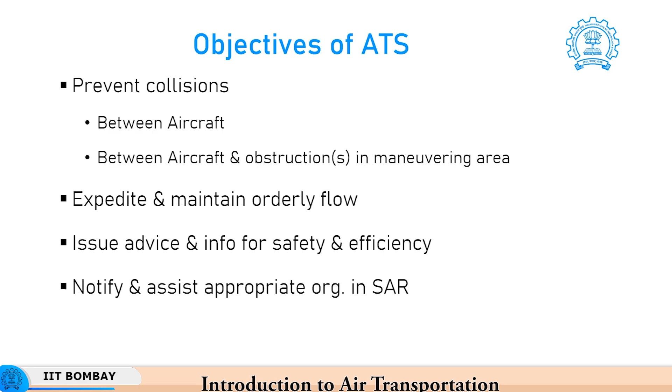To ensure that there is seamless connectivity between an aircraft from one particular airport to the other airport, and there is a continuous guidance and support available, we have to look at how the air traffic control is divided into various types, and responsibility for each area is allotted to a particular unit of the air traffic services.

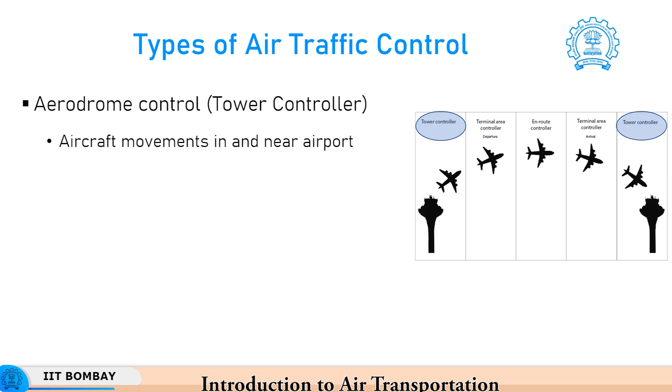So, the first of them is the aerodrome control tower, sometimes also called as the airport control tower. The words aerodrome and airport are going to be used interchangeably, so they are the same. So, the aerodrome control is normally managed by a person or a group of persons called as the tower controller. Okay. So, every airport generally has a control tower or a control cabin.

The tower controller at both the origin airport and the destination airport is responsible and concerned about the safe movements of the aircraft near and in the airport. Okay. Mainly, you can say mainly when the aircraft is on the ground. And I am not saying that the tower controller is not going to be concerned about anybody who is in the air, but the main responsibility of the tower controller is for the ground movement.

Then we have the approach control, or also called as the terminal controller or terminal controller units. These are units which are responsible for the movement of the aircraft during arrival and departure. Once the permission is given for an aircraft to initiate takeoff or to initiate landing, this particular control is exercised by the terminal controller or the approach controller. As I said, they are responsible for arriving and departing aircraft.

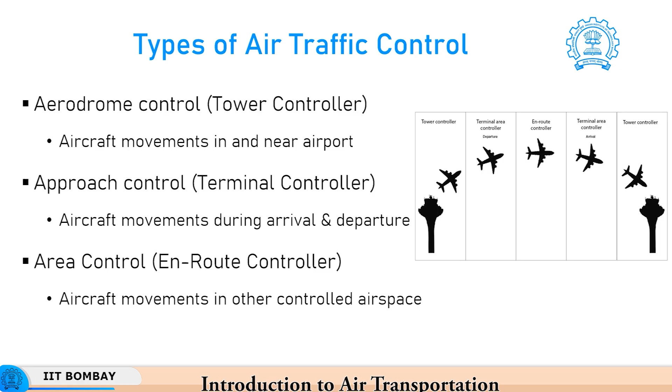They allow operations to be done expeditiously, and area control gives long term guidance and information to aircraft which are overflying. To meet this requirement, the air traffic system is broken into various units, closely related to the ones we saw.

Remember, these units could be either in the forefront or behind the scenes. The three I mentioned, aerodrome control, terminal control and en route control, are all in the forefront, but there are three or more agencies working behind the scenes. Let us look at them one by one.

The aerodrome control tower, abbreviated as TWR, looks at aircraft on the maneuvering area in the vicinity. Then you have approach control office, or APP, which looks at arriving and departing aircraft, and area control center, or ACC, which looks at en route or overflying aircraft. These are the ones in the forefront, but there are many ATS units which work behind the scenes.

There is something called the Flight Information Center, or FIC. This gives advice and information to pilots, and this is very important because the situation, the availability of navigational aids, and the weather at the destination is not the same every time. So when a pilot is about to board a flight and plan the journey, they have to be given advice and information. That is done in the FIC.

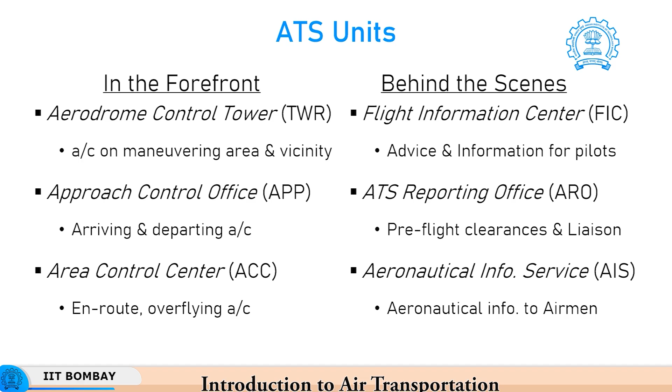In the FIC, pilots are given detailed information regarding all the things relevant to that particular day and that particular operation. But the AIS is a very generic agency or unit where information regarding all the NOTAMs is placed. These agencies work behind the scenes, but they are equally important to ensure that the goal of ATS is being met.

Now we come to the three pillars on which the whole edifice of air traffic services stands. The first is communication, the next is navigation, and the third is surveillance. Communication, navigation, surveillance is normally abbreviated as CNS, and generally the provision of services is called air traffic management. So the full acronym is CNS ATM, and that becomes the entire edifice of the air traffic services.

Now let us look at each of these three pillars, what they stand for, what they involve, and what is their importance.

Starting with communications. Communications is very important because every flying object, every aircraft is operating within the realm of the geographic coverage of an area. So it is important for everybody else to know, and there are air traffic managers who are looking at the whole scenario, so they need to talk, they need to communicate.

So communication is very important, but it is not just air to ground or ground to air communication. Communication generally is both ways, two-way generally. Some communication takes place automatically in one direction, as we will see, but generally we have communication both ways. What most people are aware of is the air to ground and ground to air communication between pilots and air traffic controllers and vice versa.

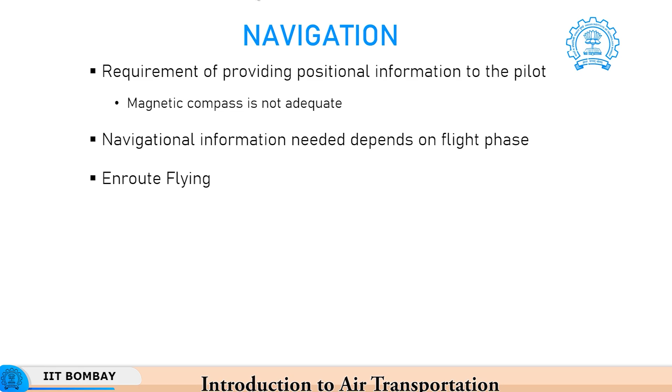The information that is required to be given to the flight crew members depends on which flight phase they are operating in. Of course, in each phase they will have separate requirements. For instance, when the aircraft is en route flying, overflying, not on the ground, not during takeoff and landing, but mostly in level cruise long distance flight,

you require your current location, and that can be done using an instrument such as the non-directional beacon, NDB, which has a unit called the automatic direction finder, ADF. This was a very primitive and old fashioned instrument, and we will talk about these instruments in detail in our talk on navigation. Then you have more sophisticated equipment called the very high frequency omni range, or VOR, and there is one more equipment called the distance measuring equipment. Many times a DME is co-located with the VOR, so we call it a VOR DME or a VORTAC. All those will come, but remember, when en route flying, what is required is your current position along the flight path that has been chosen.

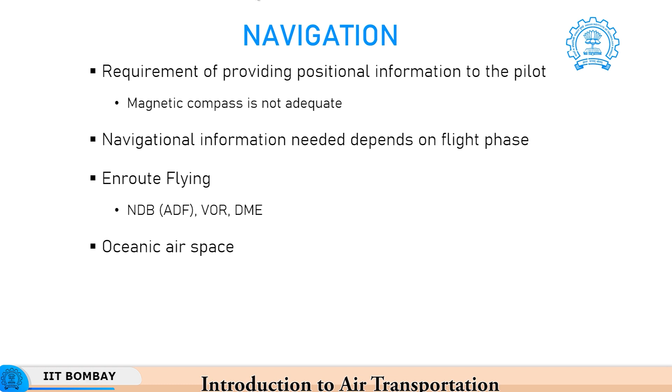But when you fly over oceanic airspace, that means over a large swath of ocean, it is very difficult to provide regular navigational updates, because in the sea it is difficult to maintain and provide navigational information, as there are no instruments available as frequently as on the ground. So there we depend mostly on the inertial navigation system, which is inbuilt on the aircraft, the INS, or the global positioning system, GPS, which is the same one we use for navigating our vehicles on the land.

When you come for approach and landing, you require a different kind of information. You have to be oriented towards the runway center line, and you have to be sure you are coming at an angle so that you will touch the runway at the correct point, so that you can land within the runway distance available. For that, we have a dedicated instrument called the instrument landing system, and we will have a detailed lecture on the working and features of an instrument landing system. Therefore, information regarding navigation is a function of the phase the aircraft is in, and appropriate instruments are available to provide guidance to the pilots.

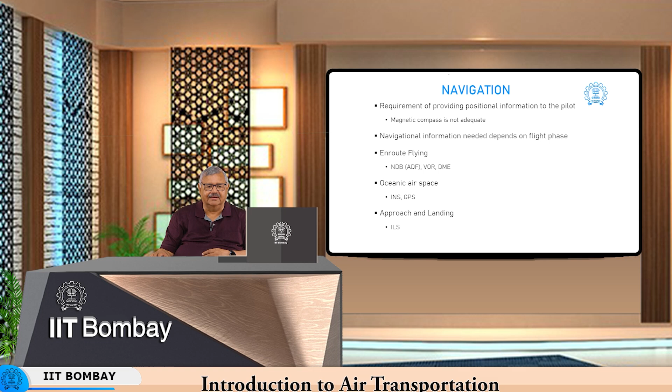Let us have a look at an example of navigation. Information regarding what the aircraft intends to do is communicated by an airline to the air traffic management services using what is called a flight plan. A flight plan is a document that mentions to the ATM agency what is the intention and what is the plan of action, and it contains lots of information.

It is filed before each flight operation. Although you may have the same flight every day, you will have to have a special or specific flight plan for each flight. It contains a lot of information which is useful for operation.

For example, it contains aircraft identification information, the call sign of the aircraft or the number of the aircraft which is on the tail. It talks about under what flight rules it will fly and what type of flight it is - we will see a little bit later. It mentions the number and type of aircraft that are going to be used. It talks about what is called a wake turbulence category - again we will look at it in more detail later on. It will tell you what equipment is available on board.

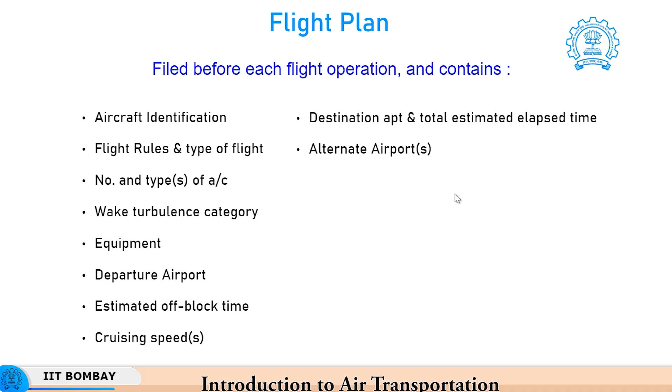It will tell you which departure airport it intends to operate from. It also tells you the estimated time when it will leave - of course this time will be adjusted by the clearances given by the aerodrome controller - and then at what speed it would prefer to fly, at what altitude it will prefer to fly, what is the destination airport, what is the total time expected to take to travel. In case there is a problem, where will you divert to - the alternate airport or maybe more than one airport - how much fuel you have, how many hours you can fly with the onboard fuel, and the total number of people planned to be carried on the aircraft.

Okay. Then what kind of emergency and survival equipment is available on this aircraft in case some incident happens, and many other information. So, this entire information which is required to be known by the air traffic management authorities for every flight is filed through a flight plan.

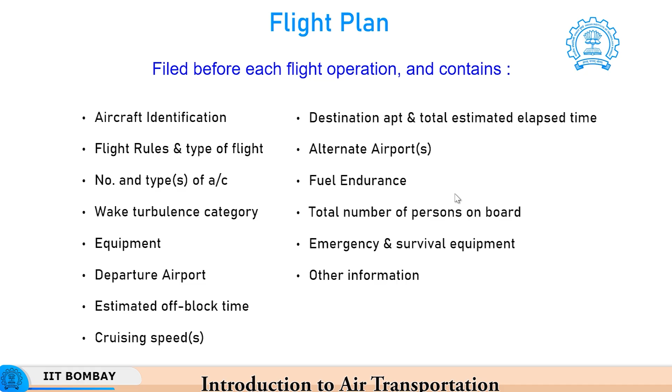In most airports or in most air traffic management zones, you need to file your flight plan minimum 2 hours before the departure. So, that is like a communication of your intention of travel, and then that flight plan gets accepted in the system, and once it gets accepted in the system, then the air traffic authorities know which aircraft are going to come at what time. Of course, they will decide which one will actually go. Rarely you will be able to operate the aircraft perfectly as per the flight plan.

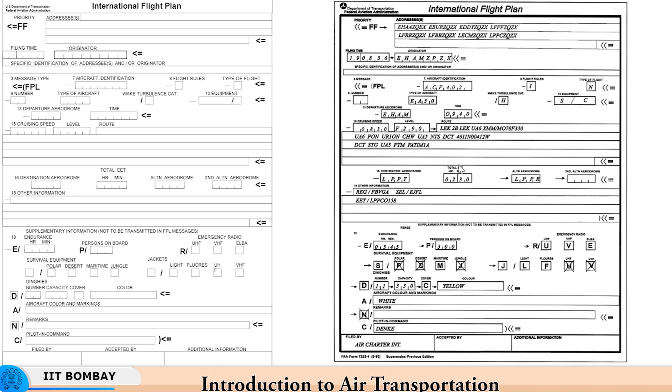So, here is an example of a flight plan. You can see the blank format of a flight plan. This is the international flight plan. So, all the things which I mentioned are all listed here, you can see. And here is an example of a filled flight plan. All the information, like for example, what will be the route, what is the flight time, all information regarding the aircraft and the route is mentioned. Normally we file a computerized flight plan. So, this information gets into the system automatically.

Now, let us look at an example of how navigation is actually accomplished. So, I have taken an example of a flight from Mumbai airport, which is abbreviated as VABB, to New Delhi airport, which is abbreviated as VIDP. This is one of the busiest routes. In fact, this is the 6th busiest route all over the world and the busiest route in India. So, let us see how flights take place along this route.

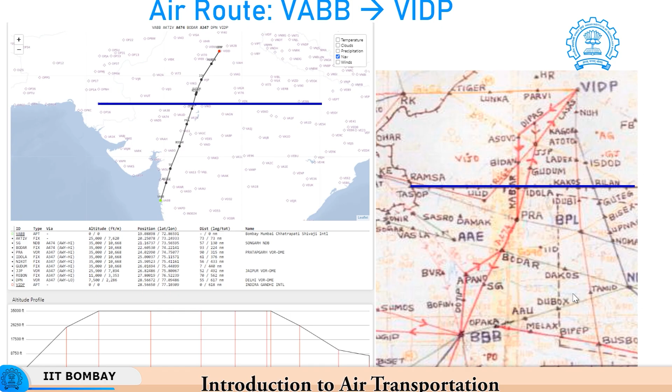Now, this blue line represents the boundary of what is called the Flight Information Region, or FIR, which we will see very soon. The area below the blue line represents Mumbai FIR. So, aircraft flying in this area are under the direct control of the air traffic controllers operating from the Mumbai zone, and the area above the blue line in this figure represents the area controlled by the New Delhi FIR or Delhi FIR. So, aircraft which are in that zone are normally controlled by people operating under Delhi FIR.

So, now we come to surveillance, the third pillar of air traffic management. So, here we just ponder and ask a question: what is the information that an air traffic manager needs when you are trying to do the surveillance of an aircraft flying in the air? Okay. So, basically what you need is a consolidated real time picture of all the air traffic that is present in the airspace which is being controlled or managed, correct. All aircraft, all flying objects in the space that a person is maintaining or operating, you need a consolidated picture and you need the information in real time.

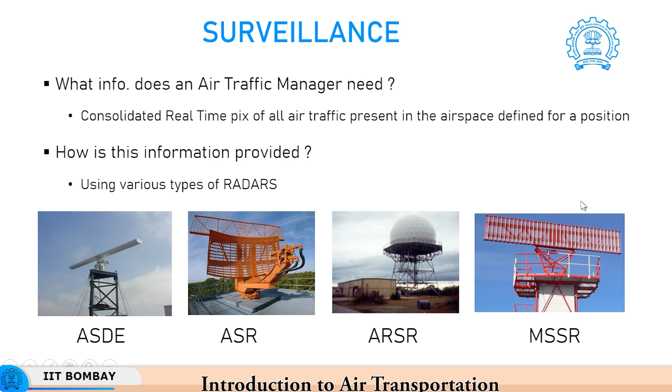It's interesting to know how this information is provided. This is normally provided using various types of radars. Okay. So, there are these 4 types of radars. The first one on the bottom left is the Airport Surface Detection Equipment or ASDE. This is the radar dedicated for looking at the traffic on the ground, and we will talk about all of these radars one by one. These are the 4 main types of radars which are used for surveillance by an air traffic manager.

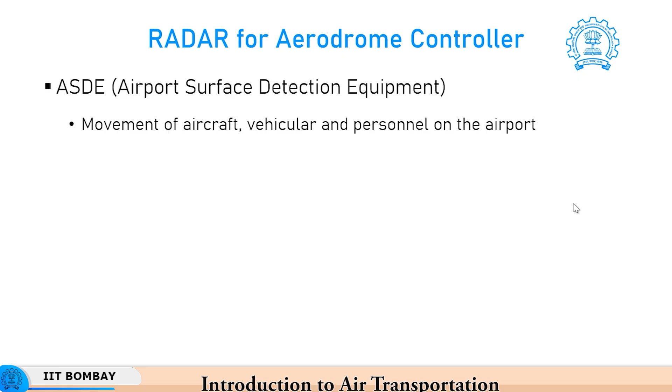So, let us look at now the radar for the aerodrome controller who is interested in surface movement, that is the ASDE. This is a very expensive equipment, so you will not see it at every airport. You can justify an ASDE only at those airports where there is a huge amount of movement. So, in India for example, Mumbai airport has a lot of surface movements and so has Delhi. So, ASDE is the equipment that you will find only at such airports. This particular radar is looking only at aircraft, vehicles and people on the ground. This is an example of the imagery that is available to the aerodrome controller on an ASDE equipment.

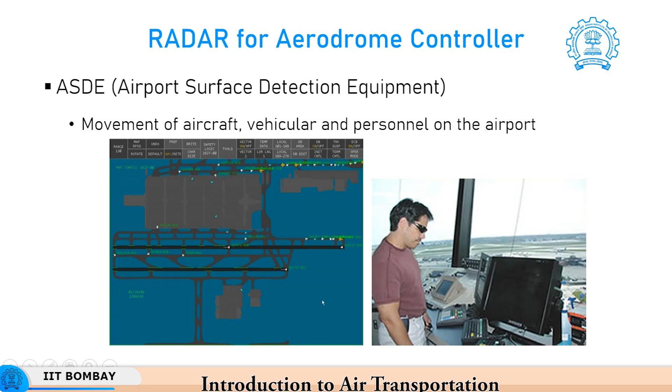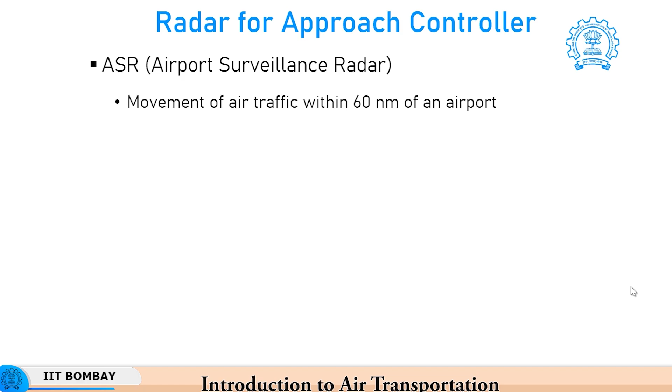Then moving on, let us look at the approach controller. The approach controller is interested in locating arriving and departing aircraft. So, they need what is called an airport surveillance radar. This radar is able to monitor the air traffic within about 60 nautical miles or approximately 120 kilometers or a little bit less from an airport, which is where arriving and departing aircraft generally are, because after that they will go to the area controller.

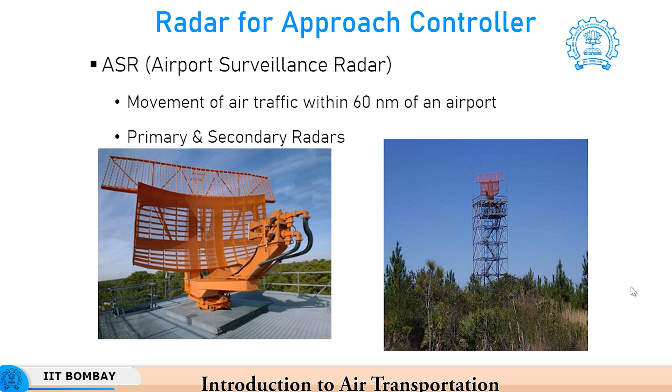Okay. So, you have here primary and secondary radars. You can see the close up of a primary radar, and you can see such radars at the airports. They keep rotating and they provide, as I mentioned, information regarding the aircraft located within around 60 nautical miles. They may be mounted at some height so that they can clear the obstacles near the airport and look far away.

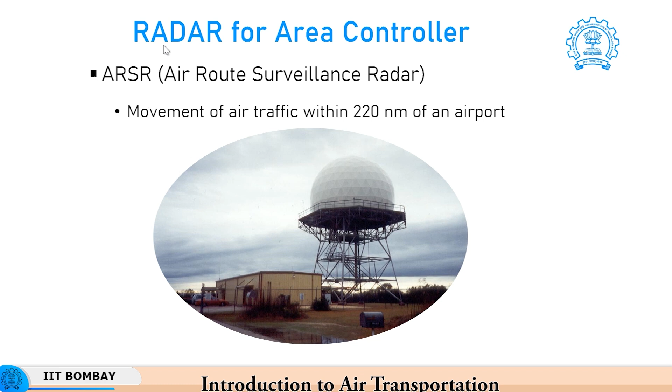Okay. Then you also have a secondary surveillance radar. Now, the ARSR which I showed you in the previous slide only detects the bearing, or which direction you are coming from. That is not enough. So, bearing basically means an aircraft is present, and what you need is more information about the aircraft. The working of the basic radar is using the detected reflections of radio signals. However, you also need extra information.

So, the secondary surveillance radar or SSR requests additional information from the aircraft. For example, what is the identity, because there will be many aircraft on the same route at various altitudes. So, just their presence is not enough, we need to know the identity. So, each aircraft has got an ID which will be flashed on the SSR along with the aircraft as a label, and we also want to know the altitude at which they are, correct. This information is communicated to the SSR by the aircraft using what is called the transponder. There is an onboard instrument called a transponder.

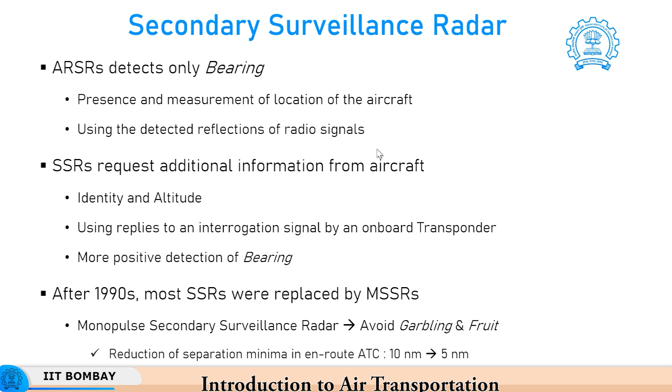So, hence the separation between them, which was earlier minimum 10 nautical miles, can be reduced to 5 nautical miles, thus allowing larger throughput. So currently most of these radars for the area controller are MSSRs.

So, summing up, let us list down the responsibilities of the air traffic controller. First, they are supposed to provide information. In some cases, provision of information is mandatory and the instructions of the ATC cannot be ignored by the pilot, except for one situation: when a pilot receives an alert from a traffic collision avoidance system, called TCAS. That is the only situation in which today a pilot is permitted to disregard the ATC input. Other than that, in all situations the pilot is duty bound to follow the instructions given by the ATC.

The second important job of the ATC, and I am going to use the words ATC and ATM interchangeably, because current usage is air traffic manager, since they are not only controlling but managing the traffic, but because of habit we sometimes just say ATC, because that is what they were called earlier. So, I will be using both ATC and ATM interchangeably.

So, the other work of the ATCO is to determine the position, the location of the aircraft. Then they are supposed to issue clearances and also clear the information, plus they are also required to coordinate the clearances between various units. So, when there is a handoff from one FIR to the other, or a handoff from one control station like approach to the area control, or from approach to the aerodrome control, that is called coordinating the clearances. So, these are the four main tasks of an air traffic manager, and the whole exercise that they do revolves around providing these four types of information.

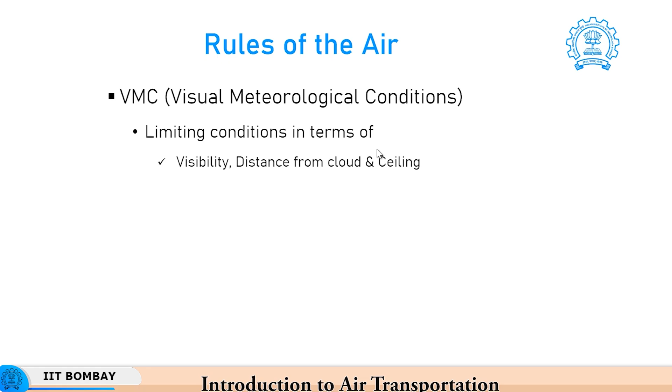But there could be scenarios when the conditions are not suitable for VMC, because the visibility is not good enough, not up to a particular distance. Then there could be clouds present in the path, at some distance and also at some altitude. So, if you are operating in weather conditions which do not permit VMC, and these are defined properly, then you cannot fly under what is called the visual flight rules.

So, when VMC conditions are favorable, the flight can be conducted under VFR. VFR is visual flight rules. In visual flight rules, the pilot is supposed to maintain VMC, so the pilot is responsible. If you are not able to do so because of poor weather, or you are in a very congested, very busy airspace, such as what I will show you in the next few slides, then you fly under IFR, the instrument flight rules.

Whenever a flight is conducted under IFR, it could be in perfectly good weather, everything is visible, but because of the tremendous congestion, you will be forced to fly IFR. In IFR conditions, the pilot need not conform to VMC; it is the responsibility of the air traffic manager to provide the separation and to give the instructions.

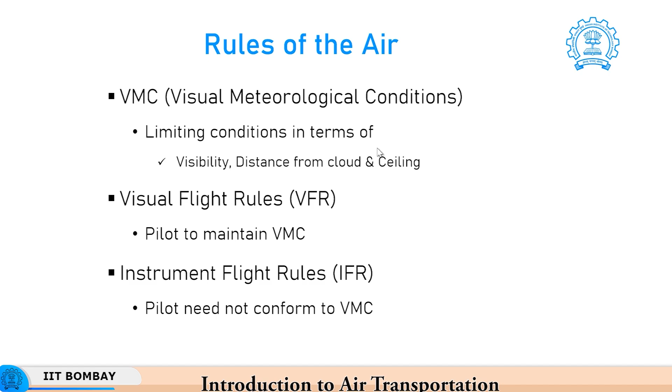There is one more category called special VFR, which is normally applicable to helicopters, etc., and also nighttime flying aircraft when visibility is very good at night. That is a special case, so it is called special VFR, but generally you have flights in VFR, flights in IFR or special VFR.

So, let us see now how the airspace over any sovereign country is classified. Before that, we need to understand that ICAO, which is a body of the United Nations, has come up with certain harmonization of operational rules, and the whole world has been divided into various flight information regions. Each country which is able to provide air traffic services is allotted a particular area, and for any aircraft flying over it, it is their responsibility to provide the required air traffic management services. These are called FIRs.

In India, we have 4 FIRs, whose territory can exceed the boundary of the country, but we have been given the responsibility of communicating with other flights and providing them navigation and ATM services. The 4 FIRs in India are the Delhi, Mumbai, Chennai and Kolkata FIRs, as you can see in the map. The Delhi FIR is completely over land and only covers the area under the sovereignty of India.

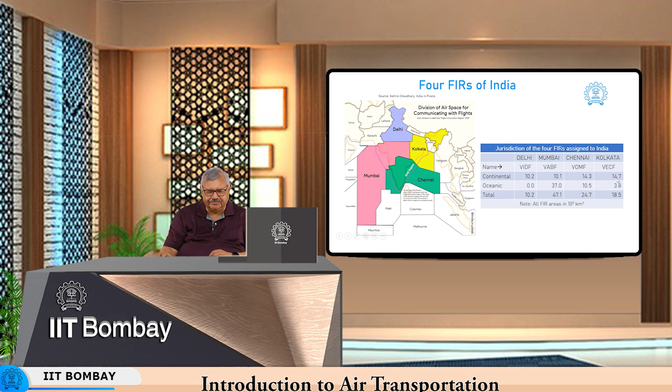Then you move to the Chennai FIR, which has around 14.3 lakh square kilometers of coverage over continental India and 10.5 over the ocean, total 24.7. And finally, we have the Kolkata FIR, which mostly covers land area, 14.7, but also has 3.8 lakh square kilometers of oceanic area, so the total area is 18.5. So, by far Mumbai is the largest FIR in India, followed by Chennai, then Kolkata, and finally Delhi.

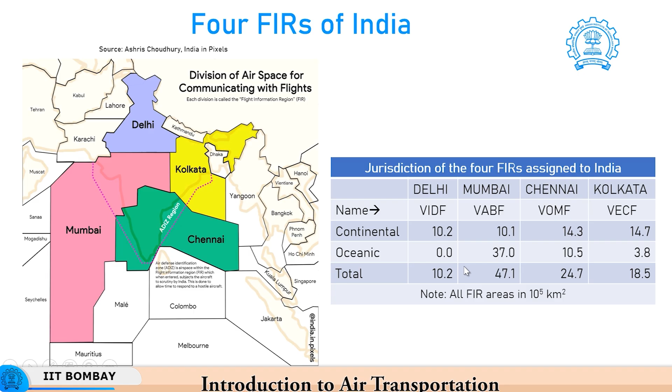Now, there are some challenges in servicing the FIRs in India. Let us have a look at these challenges. First thing is, more than half the space allotted to India is oceanic airspace, and as I mentioned, in oceanic airspace the support available from instrumentation or from navigational aids is minimum. In fact, there is a shortage. So, therefore, communication takes place mostly by repeaters or using the high frequency radio.

Now, high frequency radio has larger range, but unfortunately it has got a lot of clutter. So, it is very difficult to really figure out the signals. So, you need experts, experienced people who can listen to that communication, extract the information and pass it on.

Secondly, substantial airspace coming under these 4 FIRs is not available for civil or commercial aviation, because these include large swaths of airspace which is defense airspace or military airspace or restricted airspace or no fly zones.

In the northeast, which is mainly coming under the Kolkata FIR, you have very large areas which are difficult to reach, hilly terrain and also inhospitable. So, provision of instrumentation, maintaining those instruments, ensuring that they are not pilfered, ensuring that they work requires substantial effort and cost.

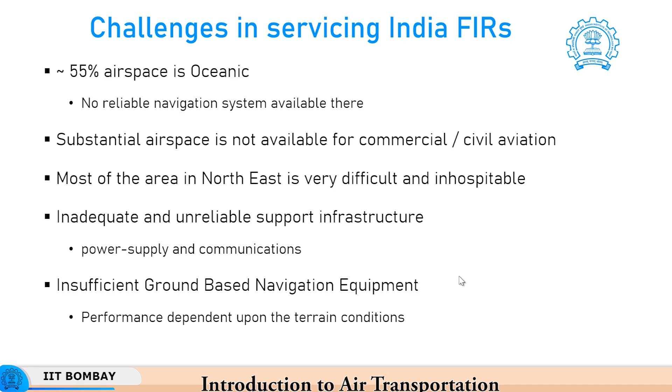Then to cover such a large area which is more than 100 lakh square kilometers, the ground based navigation systems, although there are many available, are still considered to be insufficient and they need constant upgradation. Plus, whenever you have terrain conditions, the performance can be affected. So, we have to be very careful about it. Finally, because these instruments are expensive and they require periodic calibration, they are very expensive to maintain.

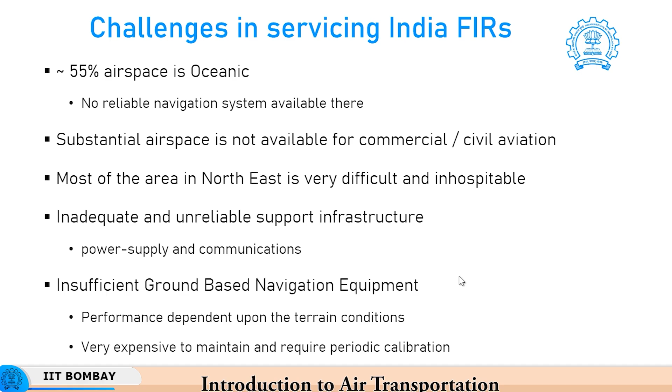I am not saying that other FIRs do not have these challenges. I am sure countries similar to India would have similar or even more difficult challenges, but these are some of the challenges which have been identified for maintaining the FIRs over India.

So, now let us see how the airspace is organized. The entire airspace over a sovereign country is not the same. There are various types of airspaces. There could be a controlled airspace, which is regulated and controlled by the ATC services, and it consists of various special airspaces such as prohibited airspace where you are not allowed to go, restricted where some aircraft can go, military use where you can go but at your own peril because mostly it will be dangerous to fly there.

Then there are special use airspaces and so many others. But there is a huge area which comes under the uncontrolled airspace, where there is no authority or control by the ATC authorities. Pilots maintain the VFR minima. So, it is not that over the entire sovereign zone controlled by India you have ATC available. ATC is available only where it is required, and as traffic starts building up, more and more areas can be converted from uncontrolled airspace to controlled airspace as the requirement may be.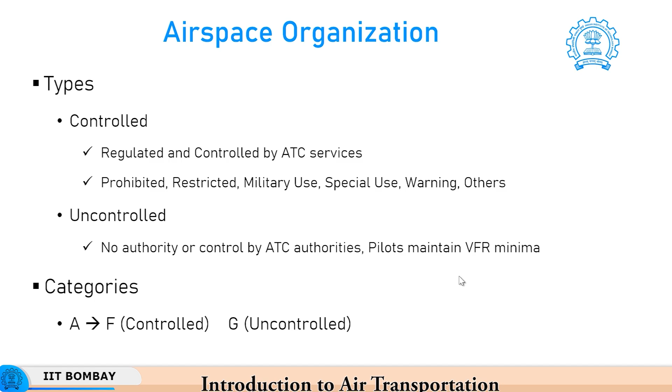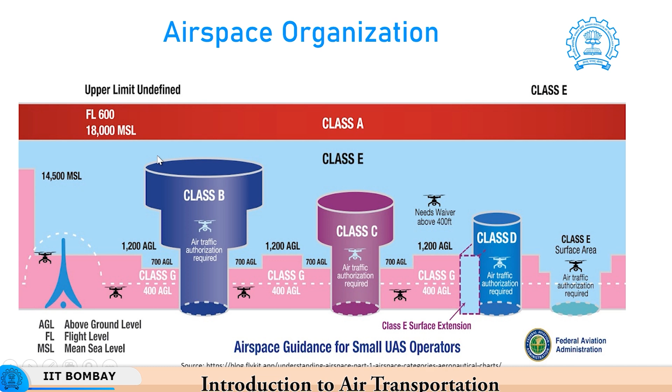The categories go from letter A to letter G, in which A to F is controlled airspace and G is the uncontrolled airspace. Here is a picture which shows you roughly how various classes are there. You can see the class A airspace is the entire airspace 18,000 feet above mean sea level, that is flight level 180 to flight level 600. This entire airspace is the class A airspace.

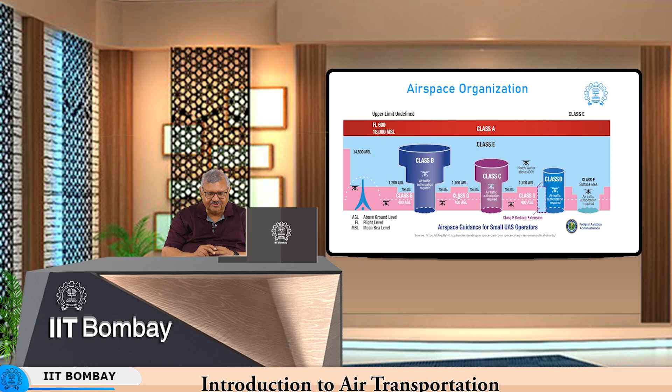Then you have class B, which is located in a particular area where air traffic authorization is required. Then you have class C, again class D. You can see this class G shown in the pink color is the airspace where you do not need direct air traffic control, because this is the uncontrolled airspace. This graph is mainly meant to show the airspace in which drones can be operated and what kind of airspace they are allowed to operate in.

So, as the letter of the airspace increases from A to G, you have lower and lower ATC control and more responsibility of maintaining separation is passed on to the pilots. So, A is the most critical and G is the least critical. If you look at class A airspace, even in perfect weather conditions, you are going to fly only in IFR. So, all flights are subjected to air traffic control. Anything that flies in class A airspace definitely has to be under the direct control and jurisdiction of the corresponding air traffic control agency.

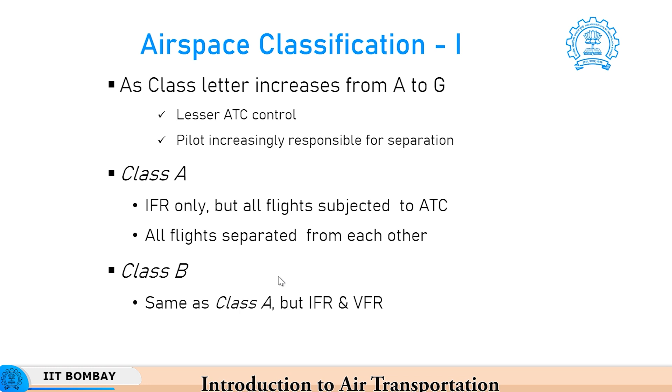All flights are given separation information from each other proactively by the air traffic controller. In class B airspace, certain things will be reduced. Now in class B airspace, you can fly in IFR or in VFR. When you fly in VFR, it becomes possible for the pilot to maintain VMC, correct.

You go to class C airspace, you have same as class B, but now separation is maintained. Between whom? If there are two aircraft flying in IFR, or one IFR and one or more VFR, separation is given in class C by the ATC. If there are flights which are VFR and other flights which are VFR, we do not give them separation information, we only give traffic information - that is class C airspace.

So, if you are an aircraft flying under IFR in class C airspace, you will be given information for separation from other IFR aircraft and other VFR aircraft. If you go one step lower, class D, you have the same thing as class C, but now you are only worried about IFR to IFR flight. If any flight is VFR, we do not worry about it. We only give traffic information to IFR versus VFR and VFR versus VFR.

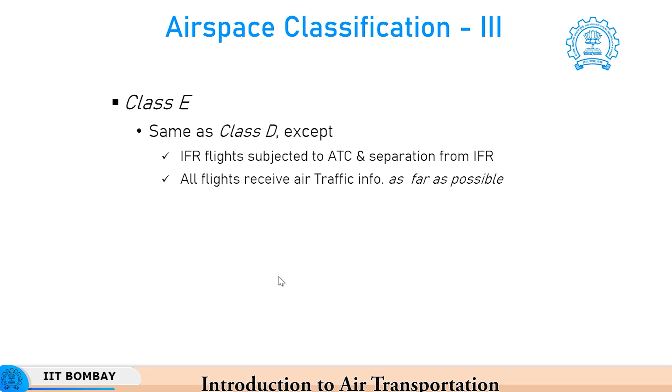So you can see slowly the control level is reducing. Coming down to class E airspace, it is same as class D, except IFR flights are subjected to ATC and separation for other IFR aircraft, and all flights receive air traffic information as far as possible. Notice, it is very important - above this category, class B, class C, it is important and mandated to give information, but here it is as far as possible.

Going one step lower, in class F, only IFR flights receive information. We do not worry about VFR flights at all, and we have a flight information service for all flights on request basis. And class G is uncontrolled airspace. Here flights will receive information if requested from the FIC, FIS.

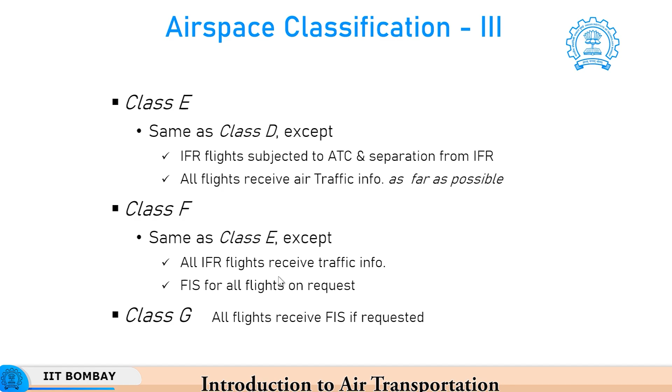Now we come to the last and the most important part on what are the norms used by air traffic managers to ensure the minima between aircraft are maintained. There could be many ways of doing it. One way is through vertical separation.

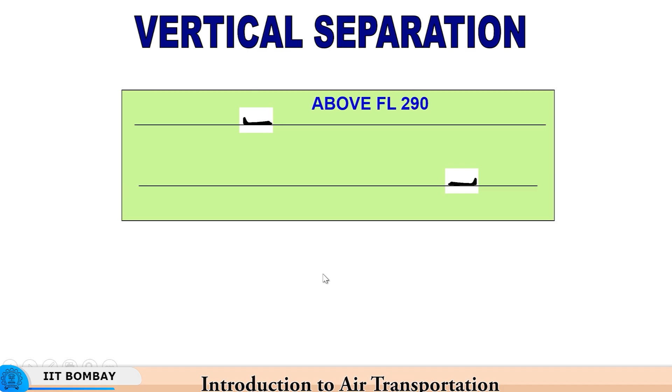If you are operating an aircraft above flight level 290 earlier, the minimum gap or altitude separation was 2000 feet or 600 meters approximately between two aircraft flying in opposite directions, but this was above flight level 290, and below 290 the gap was 1000 feet. This is old story. So if you are flying below 29,000 feet, the minimum gap between the two aircraft will be 1000 feet, and above that it will be 2000 feet.

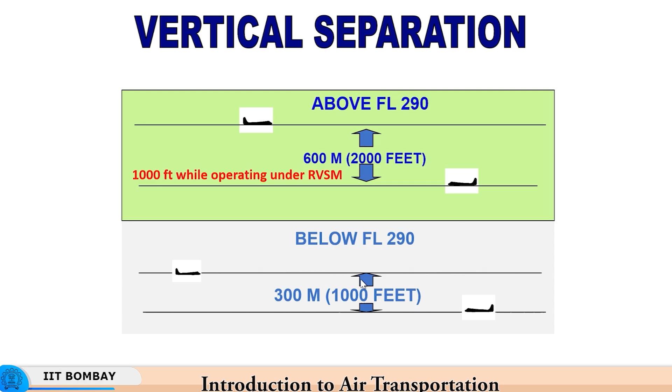However, there was an initiative to reduce this, called the Reduced Vertical Separation Minima. When that is introduced, the spacing also reduces by 1000 feet. What I mean is the minimum spacing reduces to 1000 feet even when you operate above flight level 290. Let us look at that in some more detail.

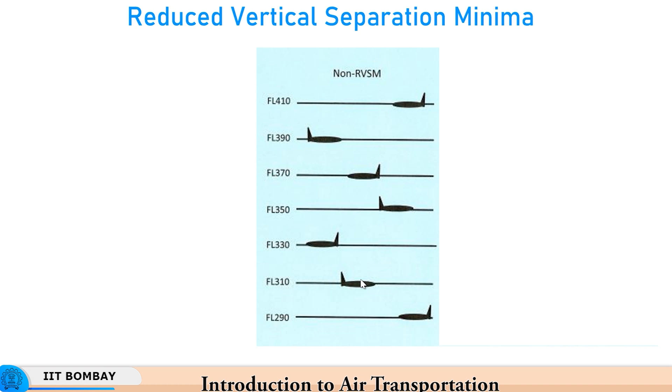RVSM - so this was a non-RVSM operation earlier. You can see that from 290 the next level will be only 310. 310 stands for 31,000 feet. When you look at flight levels, you remove the last digit and replace it with 1000 feet. So 290 means 29,000 feet, 410 means 41,000 feet, and aircraft normally do not fly above 41,000 feet. The most common flight levels are 330 and 350 for cruising flight, or even 370.

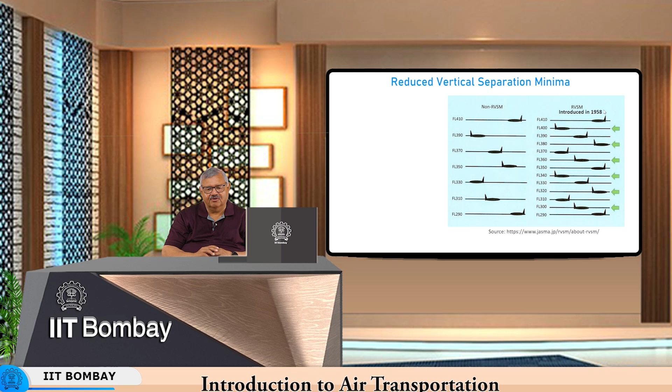Now, in 1958 RVSM was introduced, and this RVSM allowed 6 additional levels of operation. So now the vertical separation minima has reduced to 1000 feet. But it does not come free of cost - you have to have certain equipment, training and facilities.

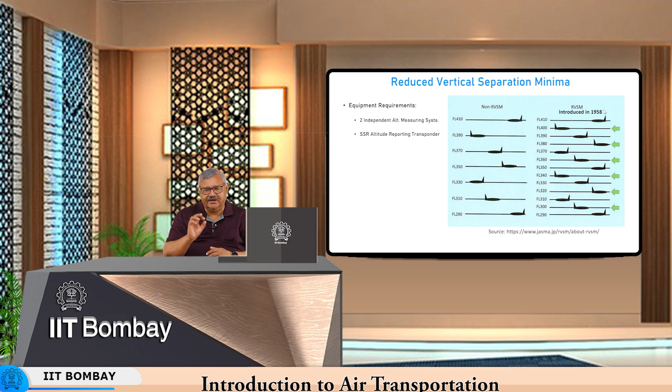So what do you need to have in the aircraft to be RVSM qualified? You need 2 independent altitude measuring systems, not just one. You need an SSR altitude reporting transponder, so your altitude is proactively communicated to the air traffic manager. You need to have an altitude alert system, so in case your altitude changes, you get a proactive alert. You need to have an autopilot, and also there has to be a flight crew approved training program or operating specs approval.

Then there are some monitoring requirements - 2 aircraft every year, or after operating for 1000 hours, or 2 years. So these are requirements specified for monitoring the aircraft. So either you have monitoring done and then certification is approved for operation on RVSM.

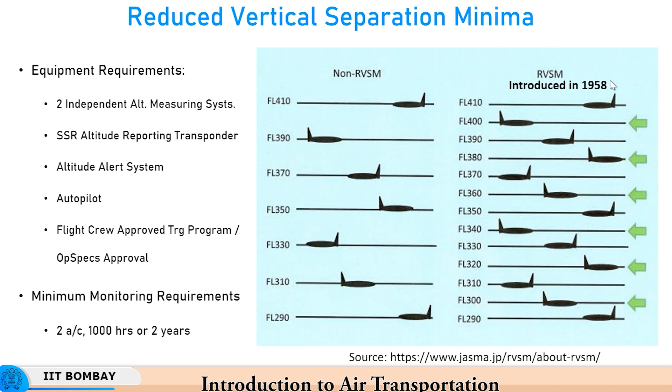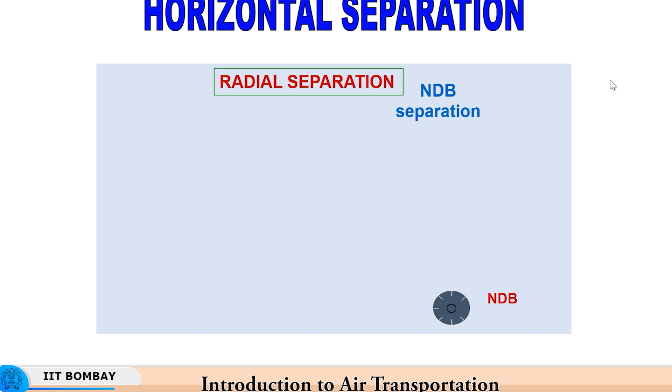You can also separate the aircraft horizontally. If you have an instrument called a non-directional beacon, which is actually a primitive, old instrument, then when you have aircraft at the same altitude approaching or going away from a navigation fix—so there could be one aircraft which has gone over the NDB and proceeding further, and one aircraft approaching the same NDB—they have to have a minimum angle of 30 degrees between them, and the distance from the instrument has to be a minimum of 15 nautical miles or 28 kilometers.

However, a slightly more advanced equipment is a VOR, very high frequency omni range. If you separate using VOR, then the radial can be reduced to 15 degrees, so lesser radial separation is permitted because you have more sophisticated equipment, but the distance requirements remain the same.

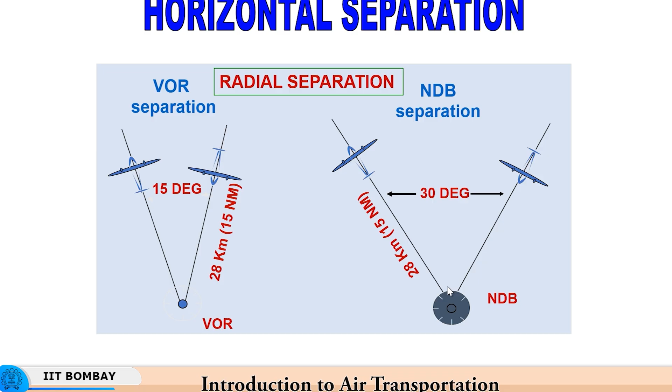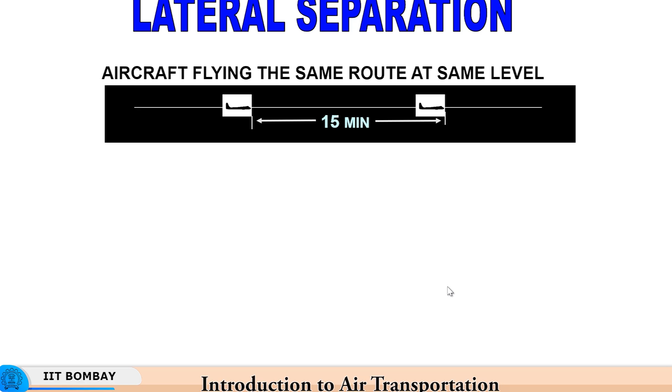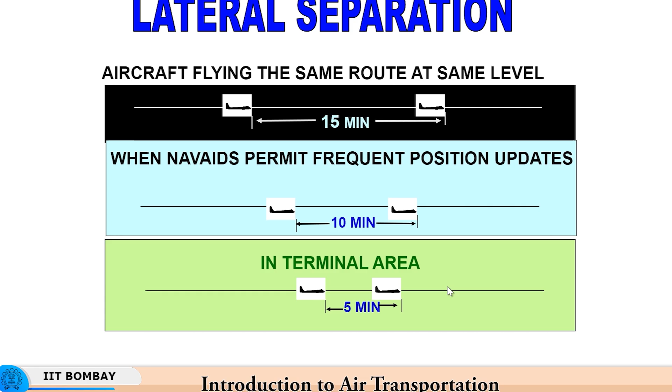Then one could have lateral separation. So, aircraft flying at the same route at the same level, one behind the other, need to maintain a flight time of at least 15 minutes between two aircraft on the same flight level in the same direction on the same route. Now, if you have navigational aids on the ground which permit more frequent updates, this could be reduced to 10 minutes instead of 15. And in the terminal area, or when approaching and landing, or just after climbing after takeoff, because you have better instrumentation coverage and radar available, you can have a gap of minimum 5 minutes. But this is for aircraft not ascending and descending—this is for aircraft at the same level, one behind the other on the same route.

Now, when you have nav aids, you can permit lower separation. So, for example, two aircraft need a 15 minute minimum, but if there are navigational aids along that route, it could be reduced to 10 minutes. Similarly, if you have one aircraft crossing the path at the same altitude, you need a gap of 15 minutes, but if both of them have navigational aids before and after their routes, you can reduce the time to 10 minutes.

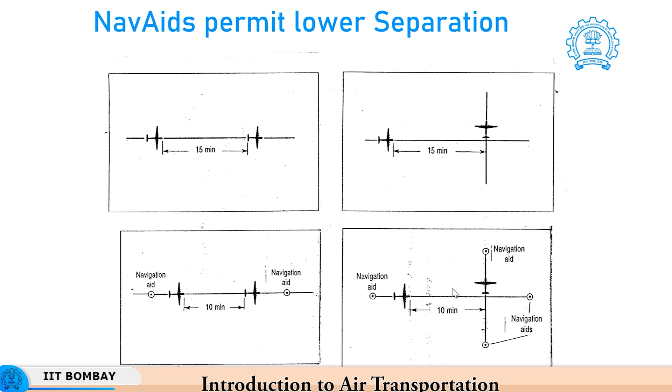Another important thing to be kept in mind is separation between two aircraft when they are departing or arriving, to ensure that the wake of one aircraft does not affect the other aircraft substantially to cause a problem. For that, certain categories have been created.

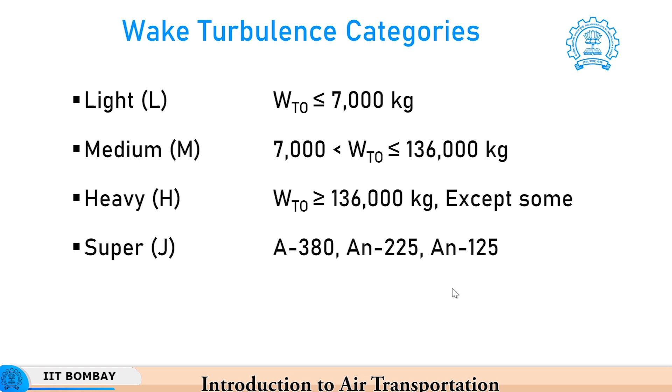As per one classification, all aircraft with a maximum takeoff weight below 7,000 kg or 7 tons are considered light aircraft. Between 7 tons to 136 tons are medium aircraft. More than 136 tons is heavy aircraft, except some which have a huge wake behind them. Then you have super heavy aircraft like the Airbus A380 or AN225 or AN125. Sadly, the AN225 was lost—there was only one aircraft available, and it was lost in the Ukraine-Russia conflict, damaged and no longer available. But we know that some of the engines of the AN225 are being recovered and can be used for powering the AN125.

But one more category was introduced between medium and heavy, called the large category. The items in black are basically the categories given by ICAO, but FAA introduced one more category called large. So: light, medium, large, heavy, super—and the large category is basically 19 tons to 140 tons.

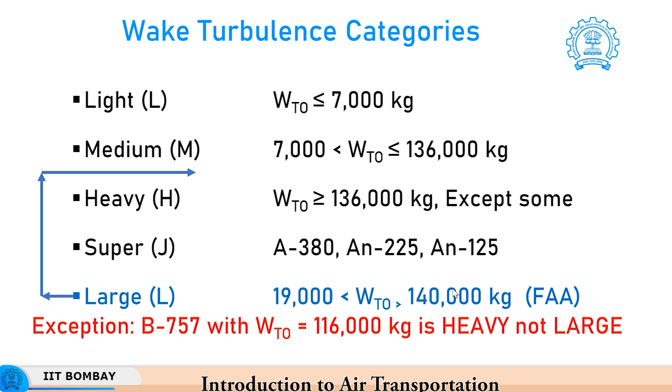Now, there are some exceptions. The Boeing 757, whose all-up weight is 116,000 kg, should actually come under the large category because the weight is 116 tons. However, it is considered under the heavy category because its wake was found to be very large.

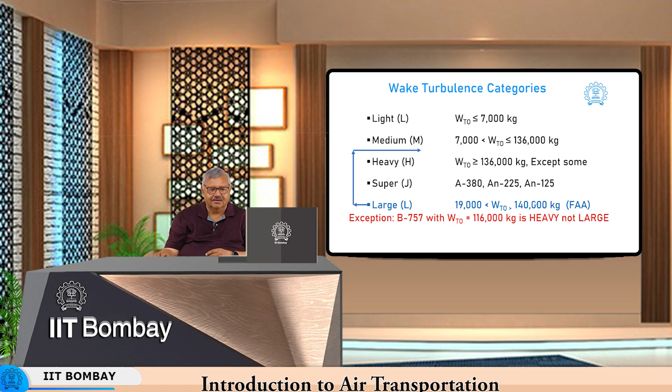So, after a few years it was realized that this separation given between all these aircraft categories was leading to a lot of congestion at the airports, because if you have to keep a long gap between two arriving aircraft, the throughput of the airport reduces. So, wake turbulence recategorization, called recat, was taken up both by ICAO and by FAA. In the USA, where FAA rules are operating, there were different approaches.

In the European Union, where mostly the ICAO rules operate, they had different approaches. Phase 1 of RECAT was launched in the US in 2013, where based on the takeoff weight, liftoff velocity, wingspan and the strength of the trailing vortex, categories were created: super, upper heavy, lower heavy, upper large, lower large and small. So they had these 6 categories.

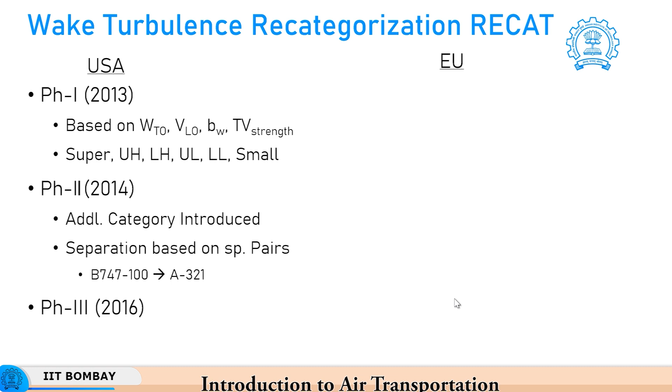Phase 2 was done in 2014, where they introduced one more category, where they said let us do separation based on specific pairs. Like when there is an A321 behind a Boeing 747-100, what is the separation needed? Rather than giving it blindly, let us do it on an aircraft to aircraft basis. Phase 3 was launched in 2016, where atmospheric conditions were also factored in while deciding the separation minima.

In the EU, RECAT 1 was launched in 2016, where the categories were light, upper medium, lower medium, upper heavy, lower heavy and super heavy. This was based on an extensive database which was created by looking at the aircraft data.

Then RECAT 2 was launched, same 6 categories as you saw, but separation is based on specific pairs, just like we had in the 2014 phase 2. Then in RECAT 3, we looked at real time data to decide the separation.

During headwind, we realized that if the air is coming from the front, then the vortex gets dissipated very quickly, so lower separation was given. If there is a tailwind, air coming from behind, then the vortex tends to persist for a longer time, so the separation time was increased.

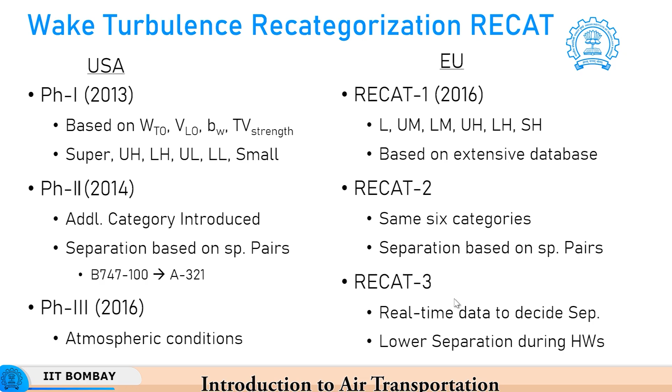All these are attempts to optimize the minimum separation between two arriving and departing aircraft, or two arriving aircraft, or two departing aircraft, so that the throughput of the airport is not compromised. That is the reason.

Then you have distances. If the aircraft is a heavy aircraft behind a super aircraft, the separation has to be either 5 nautical miles, or if it is a medium aircraft behind a super aircraft, it will be 7 nautical miles, etc. So you can see that distances have been given: minimum distance between two aircraft, depending on which is leading and which is trailing.

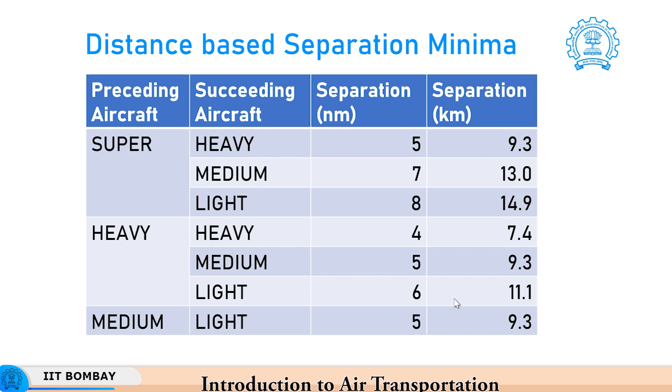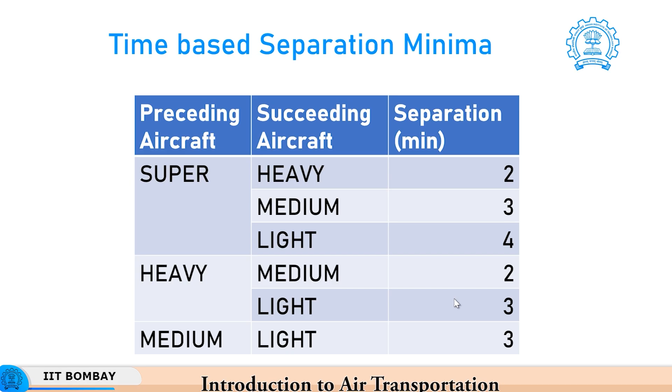Sometimes we also look at time based minima. For example, how many minutes should an aircraft be delayed? If you are flying a super heavy aircraft, then a light aircraft will only be allowed 4 minutes after the flight of the super heavy aircraft, because it has been found that 4 minutes is a huge time. So all these RECAT categories have reduced these by creating more categories.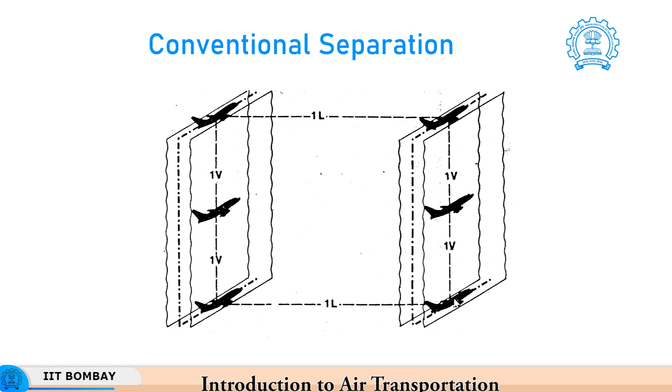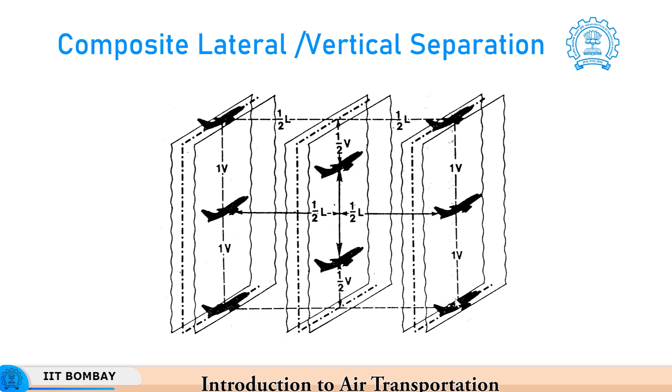Now, if you want to increase the airspace capacity, you have to look at ways of improving it. One way is, if you look at the conventional separation, there will be one layer of lateral separation and certain layers of vertical separation. But you can introduce more aircraft in between and create more space in the airspace by creating separation.

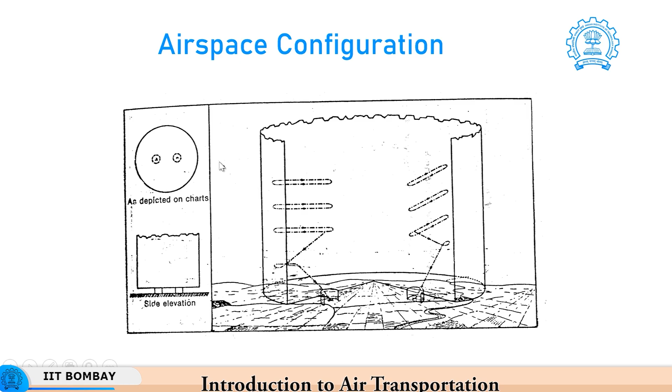But you could also have a situation where there are two airports under the same control zone, and here there will be different holding stacks at both the airports, and there will be a control zone. So this will be shown by one bigger circle and two smaller circles, or two pillars. That is how it will be shown in the charts.

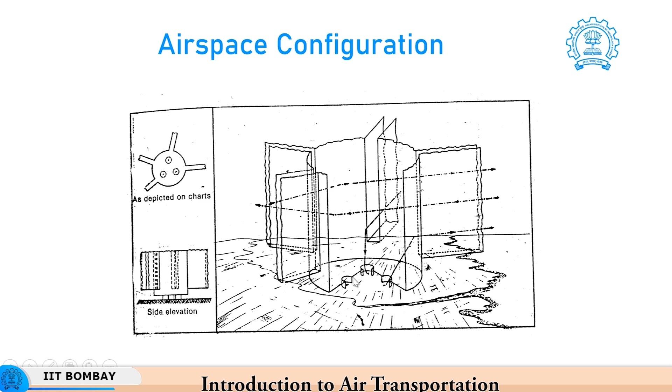Sometimes you may have many routes from where aircraft are coming in, and then there are 3 small airports, so they will be shown like this in the charts. Or you could have a situation where there are also certain other airports which have paths that go. So there are all kinds of configurations which are used, and these are then depicted into the maps accordingly.

The airspace also has got certain regions. There is FIR, UIR, one could classify them. So I think these are details which we will not like to get into. So thank you for your attention.